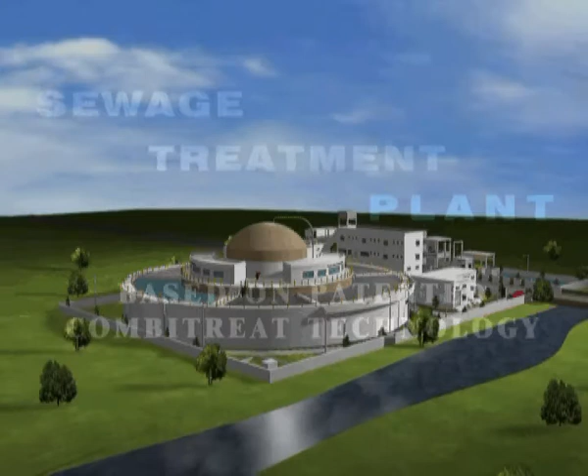Since 1984, the organization has concentrated on wastewater treatment technology and now has 25 years experience in the field of wastewater treatment and engineering. During this period of 25 years, the organization has successfully constructed more than 50 sewage treatment plants of diverse magnitudes for a wide range of clients.

The rich and valuable experience accumulated by the organization's core team over the years has enabled introduction of numerous specialty technology considering the constraints of flow, electricity and space.

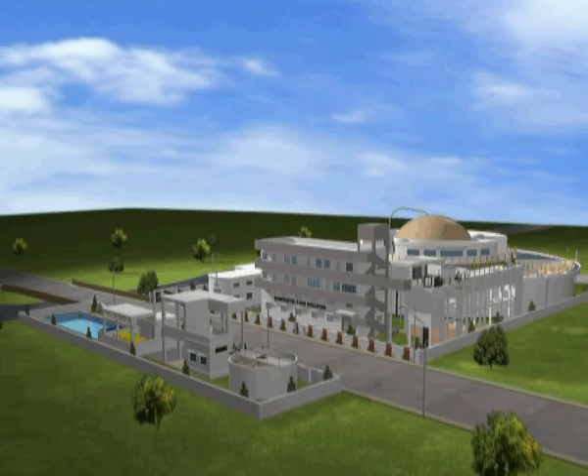While executing these diverse projects, the organization has successfully handled different treatment processes such as extended aeration, activated sludge process, carousel aeration process, bio-tower technology, that is attached growth process, sequential batch reactor process and package treatment plant, etc.

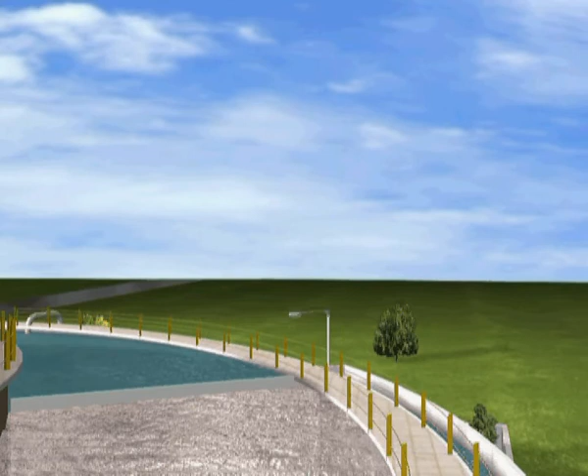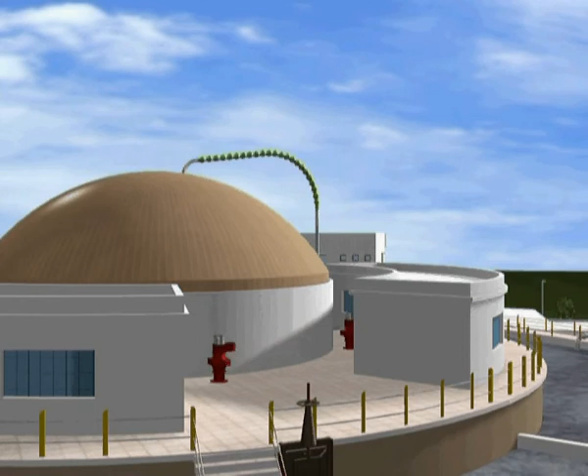The presentation which you are now viewing is of a wastewater treatment plant based on Combitreat technology. This is a cutting-edge technology in wastewater treatment developed by HNB Engineers Private Limited, giving careful consideration and proper weightage to the constraints of universal shortage of land and power and skilled manpower to operate the plant. This will be a patented technology of the organization and application for patent of Combitreat technique is in process.

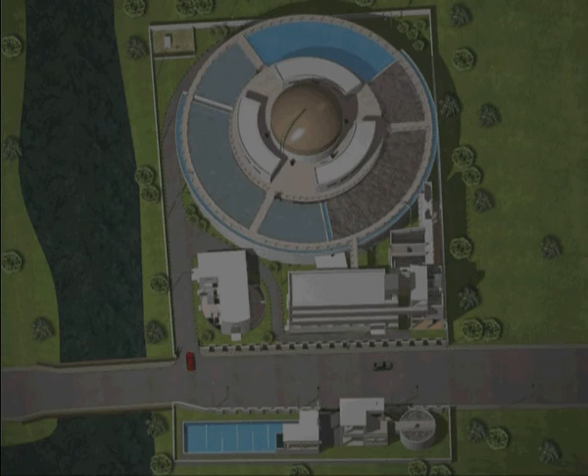Your screen now shows various units which are integral part of the process of sewage treatment irrespective of the technology adopted, along with a patented unit of Combitreat. The individual units are raw sewage sump and pump house, primary unit, laboratory, sludge thickener, centrifuge platform, chlorination room, chlorine contact tank, administrative building, patented Combitreat unit, hydropower generation unit, biogas-based generation unit and control room.

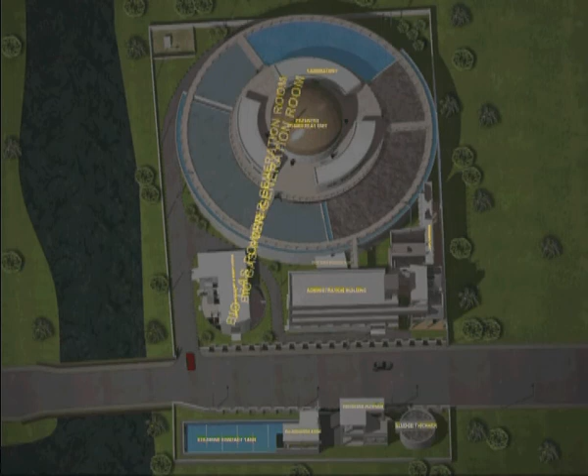The schematic representation and sequence of treatment includes receipt of raw sewage to sump, removal of floating material in coarse screen chamber above 20 mm size, removal of floating material in fine screen chamber above 6 mm size, removal of inorganic matter of specific gravity greater than 2.65 and particle size more than 0.15 mm in grit removal tank, biological treatment in Combitreat, generation of methane and generation of electricity, generation of hydropower.

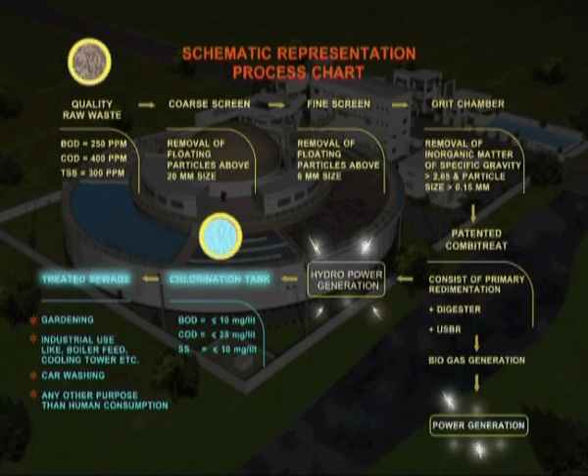The excellent quality of water discharge at outlet enables the same to be used for gardening, industrial purpose cooling tower, air conditioning, car washing or any other purpose than human consumption.

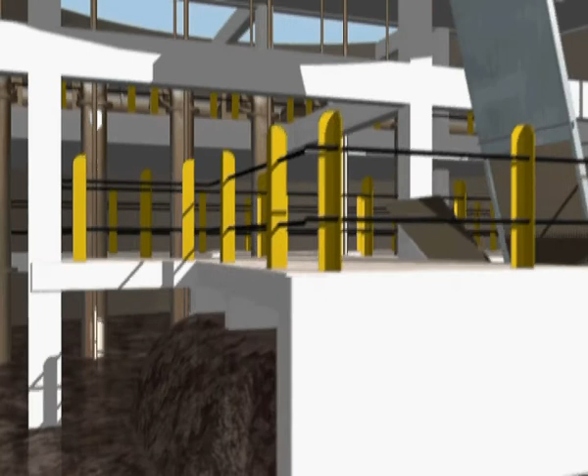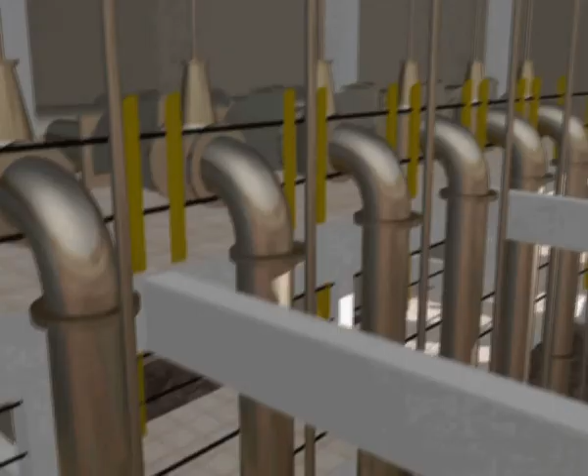The sewage after entering into raw sewage sump is screened at coarse screen chamber where particles above 20 mm size are separated and removed mechanically out of the sump. Removal of floating material at this stage increases working life of the pump. The liquid, which is now free from large size solids, is pumped to the primary unit. Screenings separated by the above process can be used for dumping, landfilling, etc.

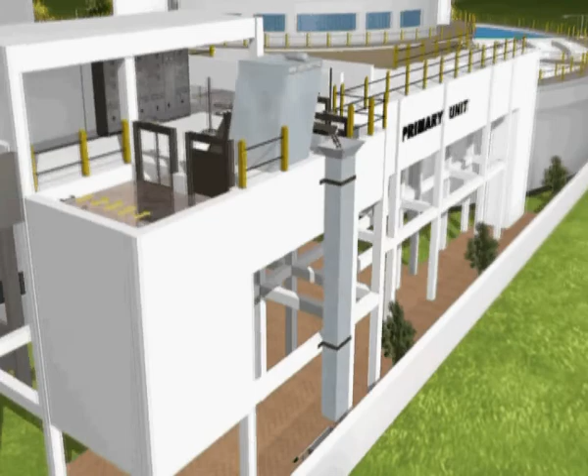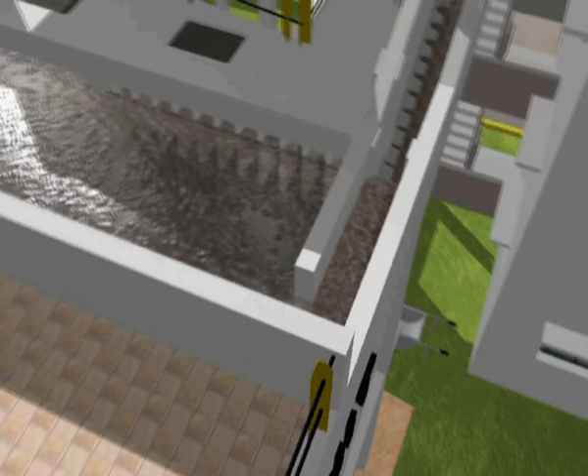The liquid received at primary unit is fine screened to remove floating particles of over 6 mm size and then passes through the grit chamber where inorganic matter is separated. At this stage, the sand and grit particles are removed from the system with the help of a mechanical screw.

From primary unit, sewage will now flow to central zone of Combi Treat unit from bottom. The outlet launder being provided at periphery and at the top of unit, the liquid will flow from bottom of Combi Treat unit towards top of the container, from where it will flow out to SBR tanks for its aerobic treatment. At central zone, during the time of traveling liquid from center to periphery, sludge particles will settle and settled liquid will only go out.

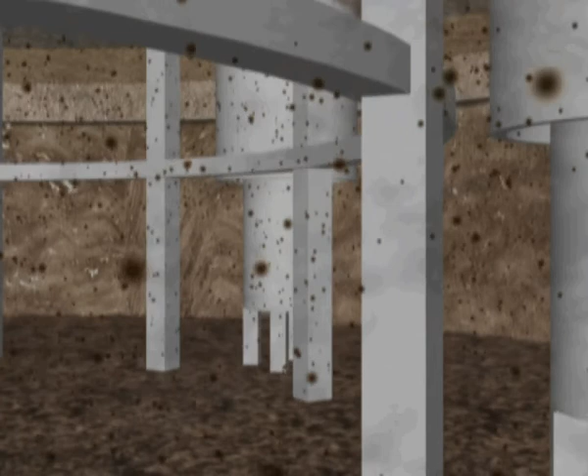The settled sludge particles contain higher concentration of pollutants expressed in terms of BOD, COD, etc. The comparatively weakly polluted liquid will flow out to SBR.

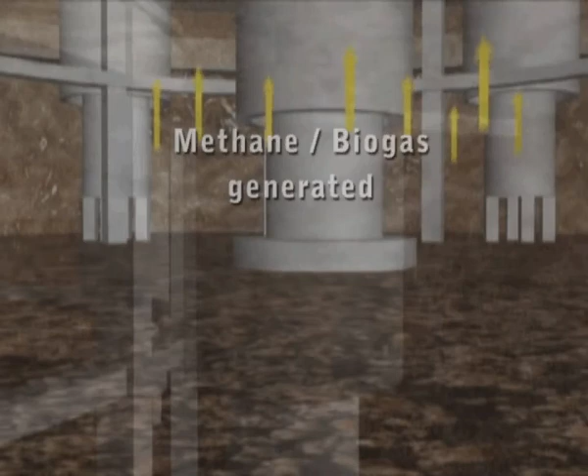The principle of this system is to treat heavily polluted sludge anaerobically to save power and to generate biogas as fuel for electricity. The contents are mixed thoroughly, which enables generation of biogas. The methane biogas generated in the process at central anaerobic zone, being light in weight, will flow upward and will be collected at central dome portion. The dome has a facility of moving up and down to accommodate variation in volume of biogas.

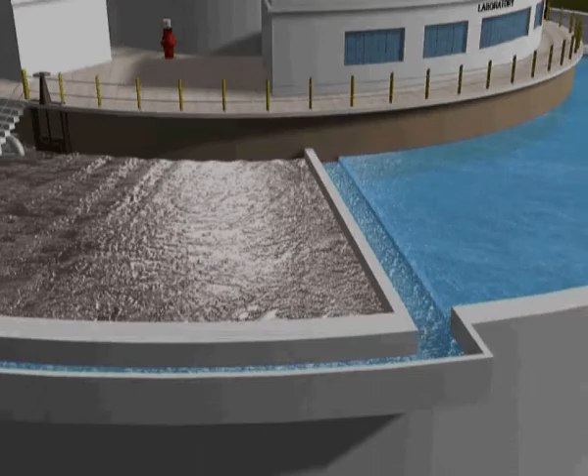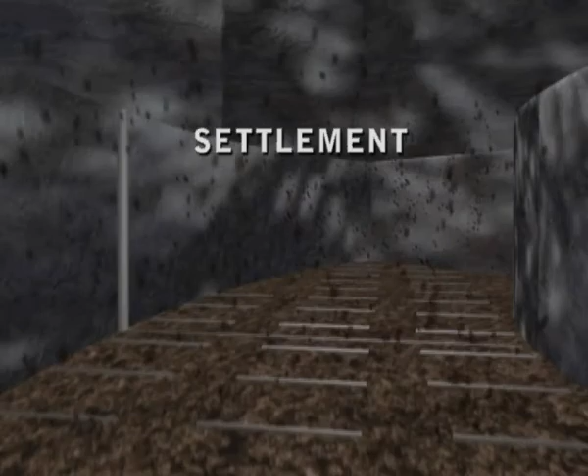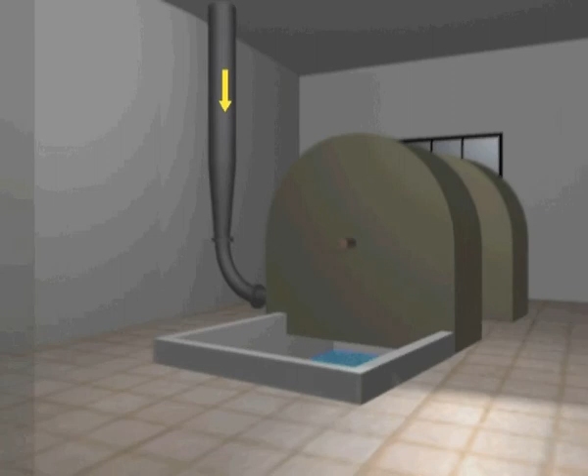The overflown liquid from central zone will be received at CLSBR tanks for treatment in batches and in sequence of aerate, settle and discharge fill. This is a constant level method. The CLSBR technique does not demand any loss in head during process of treatment and discharge. Hence, constant head is available at discharge point, which is utilized for driving turbine for generation of hydropower.

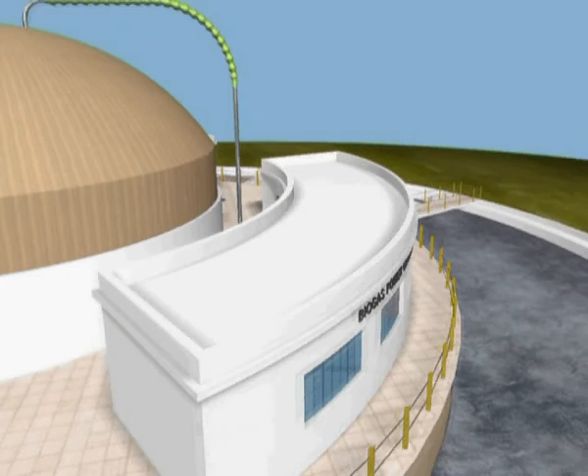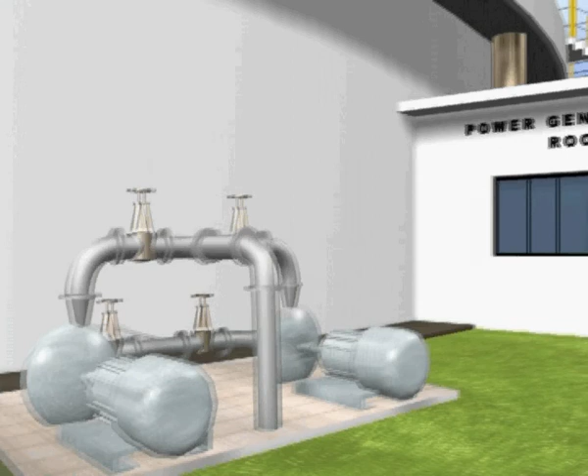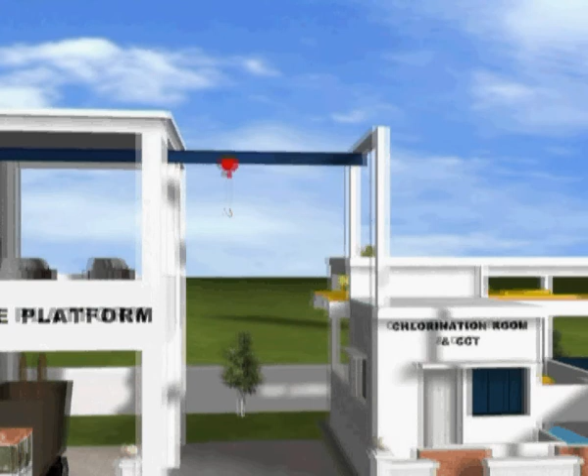The biogas collected at central dome will be used for generation of electricity by providing biogas engine connected to alternator. Excess sludge generated within the system will be thickened at thickener before passing the same through centrifuge for dewatering. Treated water coming out of plant after driving the hydropower turbine will be disposed of after giving chlorination treatment at chlorine contact tank.

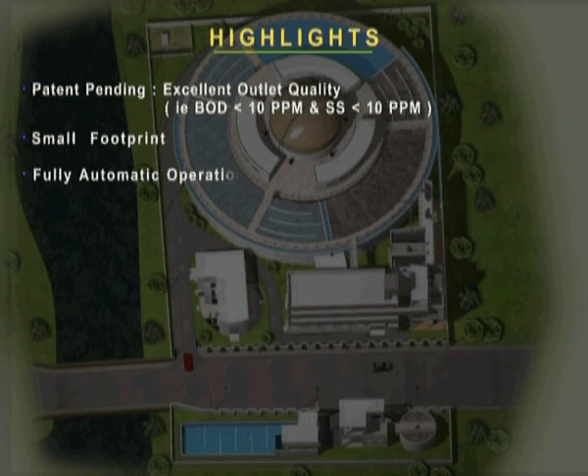The highlights of the project are excellent outlet quality, small footprint, fully automatic operation with PLC, compact design, lowest power consumption than any other method of treatment having guaranteed output, capacity of hydropower generation, capacity of generation of power from biogas. Total power generation is up to 80% of power required for sewage treatment, and minimum manpower for operation and maintenance.